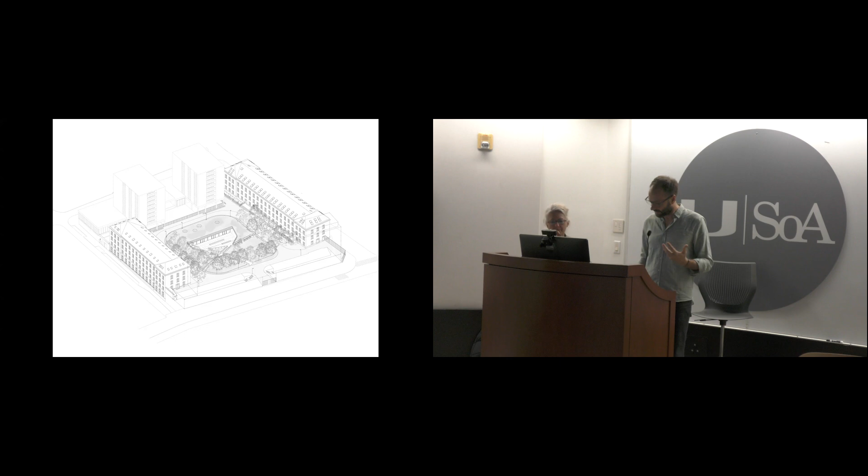So in the end, we just dug a little bit into the ground, creating three different pathways, three different stairs with different speeds for the students to come into the entrance of the university. The stairs are at different scales, depending on whether you are in a hurry or if you have time.

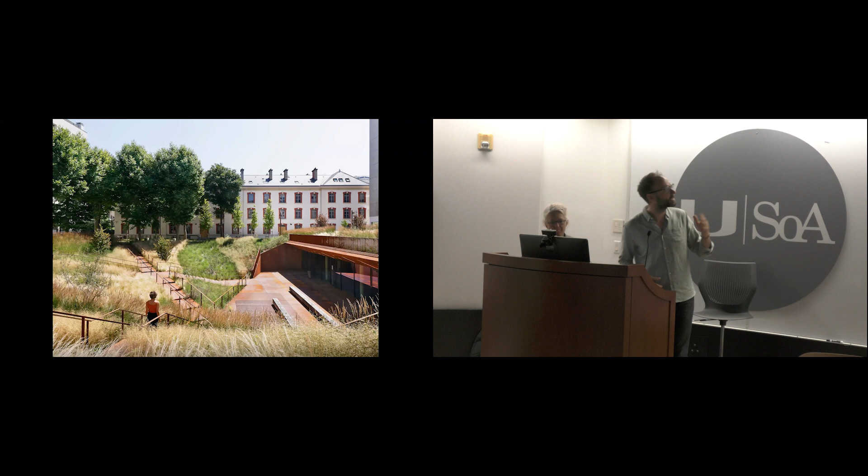You can enter this and then cross this garden, being quiet, coming out from the very loud city, and then entering the university through this opening in the ground, this opening onto a garden, like a scar on the garden.

So we created places to sit and communal spaces for the students to be inside. Instead of adding architecture, we're just creating a garden and subtracting things rather than adding them.

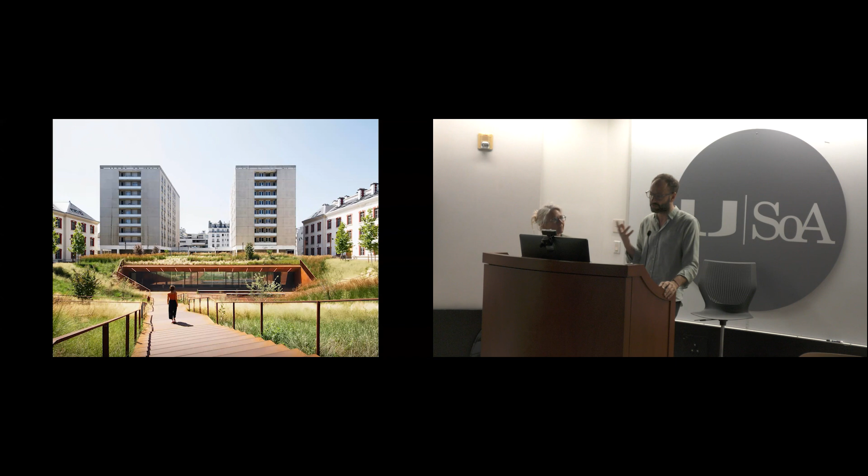So I think this is also a first step for us: thinking gardening, thinking architecture, and thinking architecture through the landscape, and not in the inverse situation. We also used this rusted metal, because I think this is more a landscape material that we use a lot in gardens rather than in architecture.

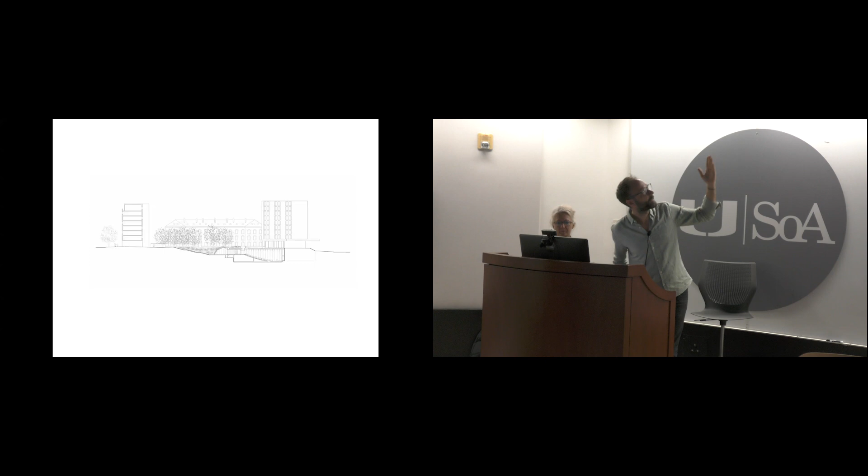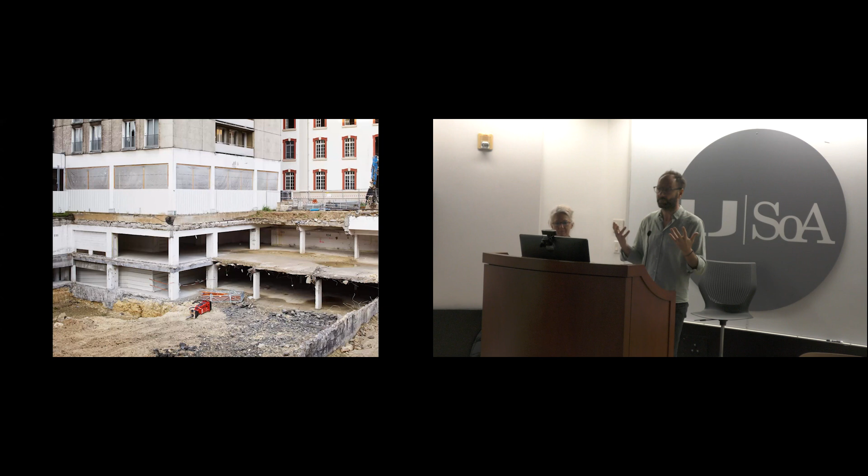So you're coming down from the city and entering this gallery, then you see the section where you just cross the garden, entering the gallery, which links these two buildings, and then going back into an auditorium. What was interesting here is that you had these two levels of parking that were totally empty. So we convinced the client to use this space, this volume which is already built, rather than adding another building.

Just destroying these intermediate slabs and creating an auditorium inside of it. So using what is already existing, acting by subtraction rather than addition, is also a very interesting act for us. And I'll show it very quickly, how we worked on the stairs, transforming this old barrack, creating these beautiful stairs that give also a sense of public space rather than only rooms.

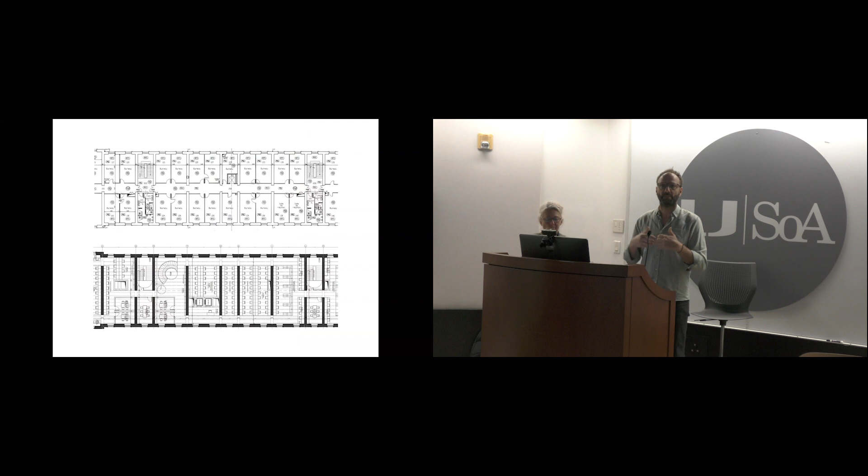Thinking about the existing structure, we couldn't break all the walls inside here because there were just rooms. So we decided to disconnect the intermediate wall from the facade, to create what in French you can call an enfilade, creating the sensation of a space but without creating a very large space.

And then we also reused material to create these lamps, creating this atmosphere inside of it. So this was the first project, very simple, showing how acting on the landscape is maybe the cornerstone of creating architecture.

This is also an office in timber frame, where we decided to be exactly inverted like this project on the right - not keeping the void and the landscape for us, but offering this to the city. So this strange shape came here just to create two gardens connected to the urban fabric, instead of creating a patio where you keep the space.

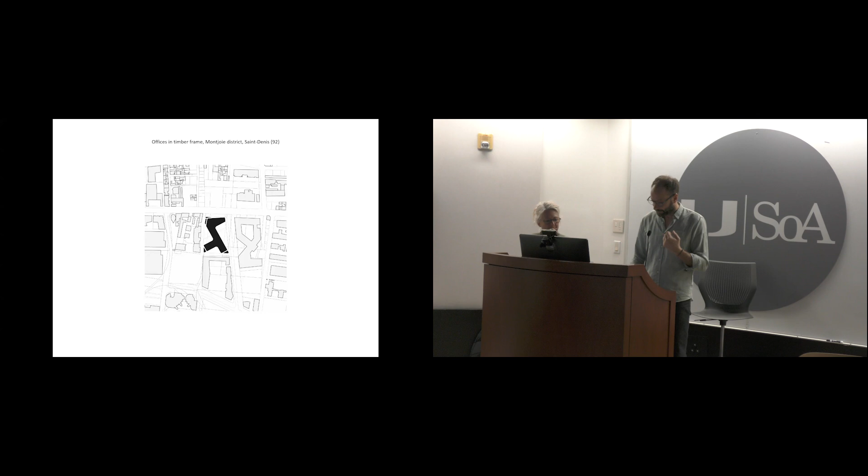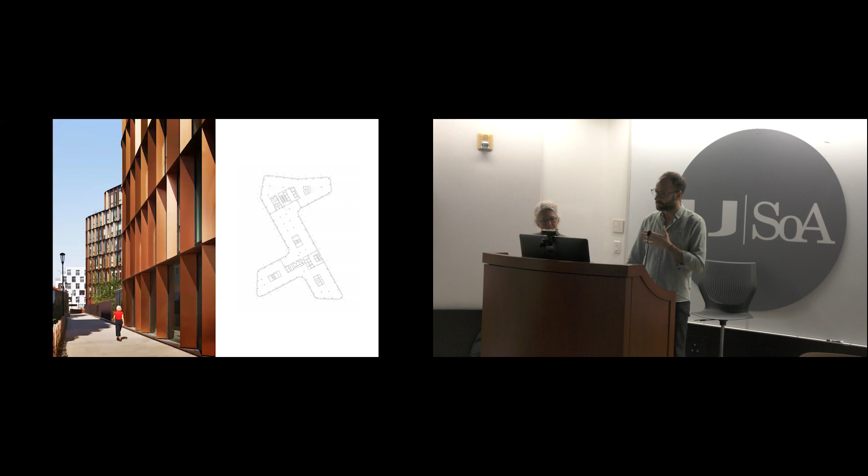So this is a strong position, creating two gardens that you can offer to the city, which defines the shape of the building itself. The building, made of wood, sits in between a garden. You can see the floor plan, these voids, the openings of the streets, and this very wild garden.

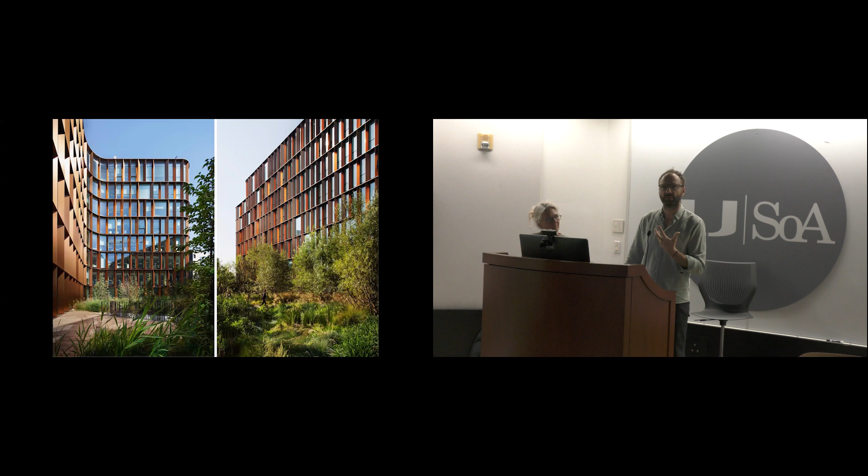I'll come to this a bit after, about how we think landscape should keep a little bit of wildness, something more ecological that can welcome biodiversity.

Again, simple collective housing and gardens in the canal in Pantin, very near Paris. You can imagine how creating this central garden defines the typology of the building, opening these courtyards and creating a relationship between the city and the inside of the project.

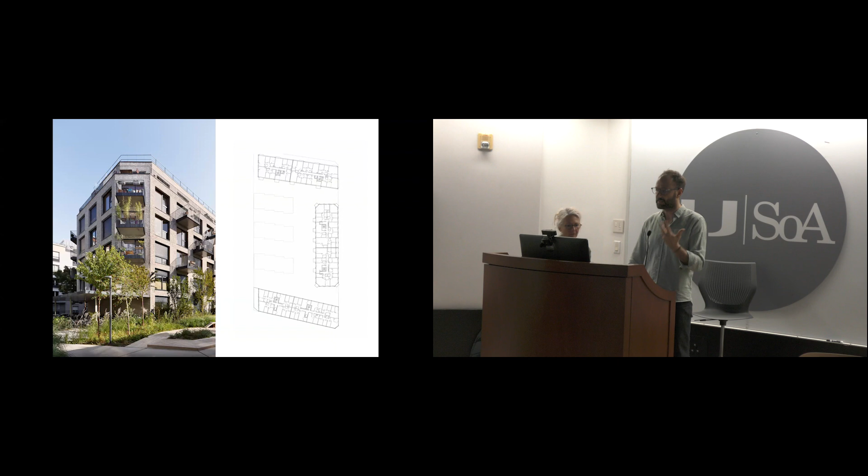So this is a facade on the canal, very simple, very open, so people can have this connection with the great landscape. And opening to the street, instead of closing off the area and the plot, creates an opening so that people from the city can enter this garden during the day. That was also hard to convince the client of, but offering this space to be shared with the public.

So you have this section with the different buildings, and this garden on the courtyard comes up on the roof of the little houses in the middle, creating a garden for the people, and a roof garden made only for birds and insects, not for people.

So this inner courtyard is open to the city, creating this relationship so that a public space, a garden, can really be somewhere people can meet in the city, and not closing this too much to the private area. That leads us to the second part of the lecture.

A garden does not simply occupy a plot of earth; it also mobilizes the mental space and helps to reconnect with experience - doing and observing, readjusting our acts as we go along rather than deciding on everything beforehand.

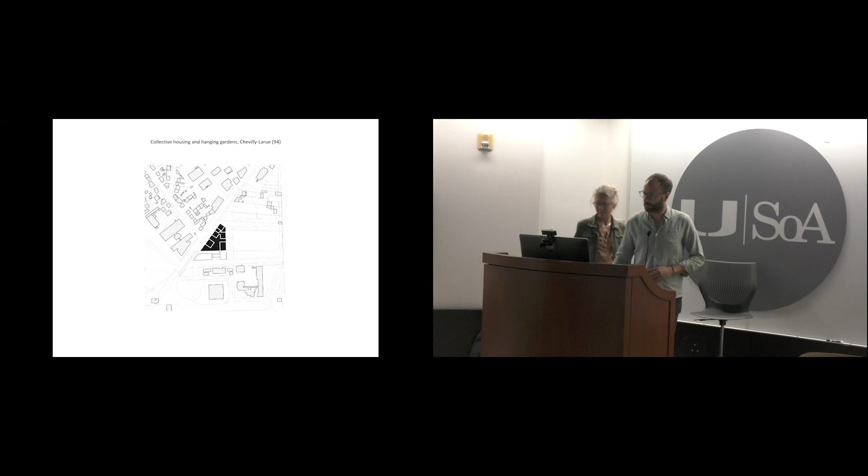On this subject, I will show you some projects like this collective housing, social housing, affordable housing in Chevilly-Larue near Paris, where we decided to create a lot of links between each building and create different spaces for the people to be shared.

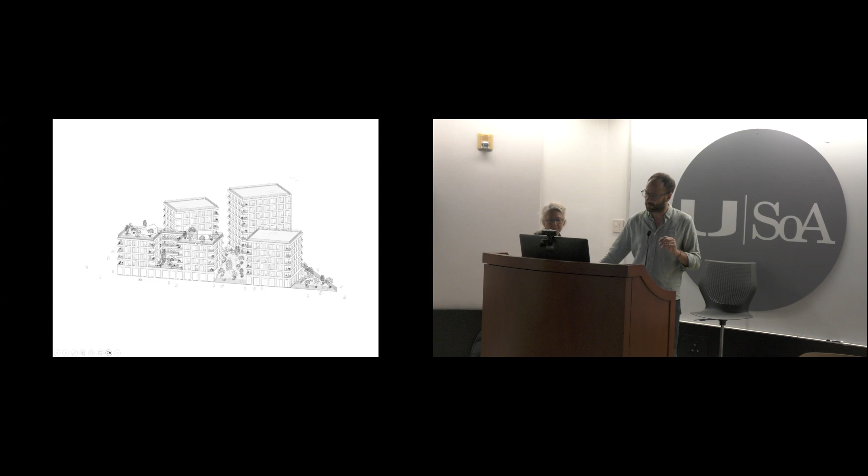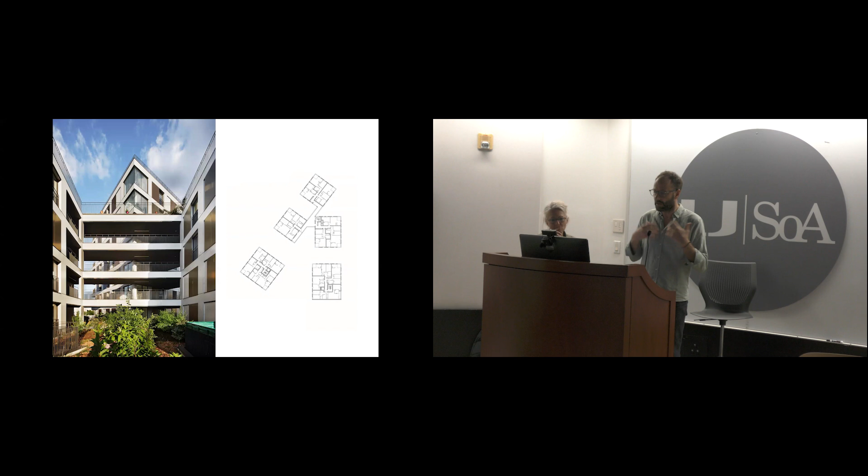So here you have several blocks. We exploded the program into 5 different blocks that could have links between this garden here, for the people of the city to cross, and then also a roof garden that can be connected just with simple footbridges. The idea is that this garden can create a communal life and allow people to spend time a little bit more together. I think this is very important, these gardens are good for environmental reasons.

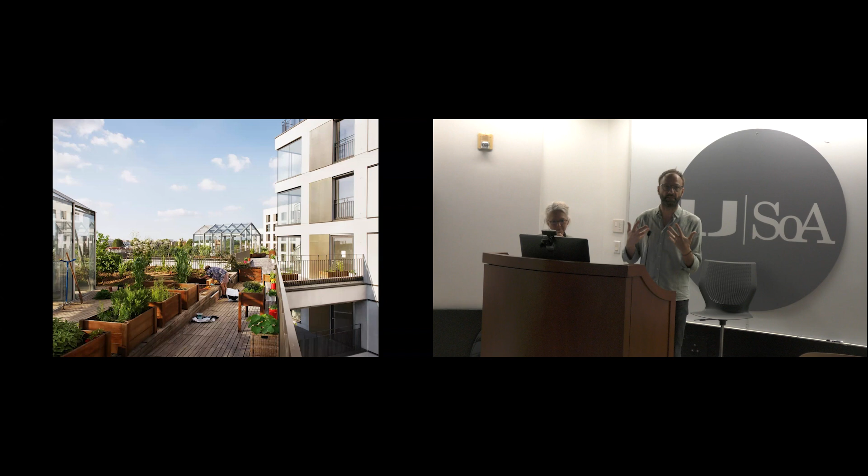But also for social connection between people here. And then this rooftop, because this is social housing, every space is very tiny. So these spaces, which are shared between all the housings, are spaces where people can share around this garden. Garden, as Pascale was saying, has this power of being shared between people.

Another project which is also very much defined by urban and landscape thought is this management school in timber in France that we just finished last year.

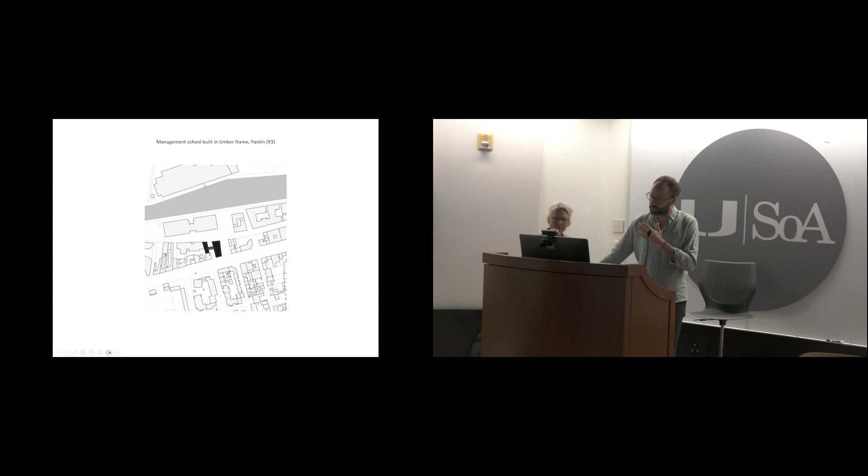So this is a wood structure, so you can see this difference between the massive wood on the first floor, and then it's getting more and more light, because of course it's different than concrete, so you have to adjust the quantity of wood you can put in a very simple frame.

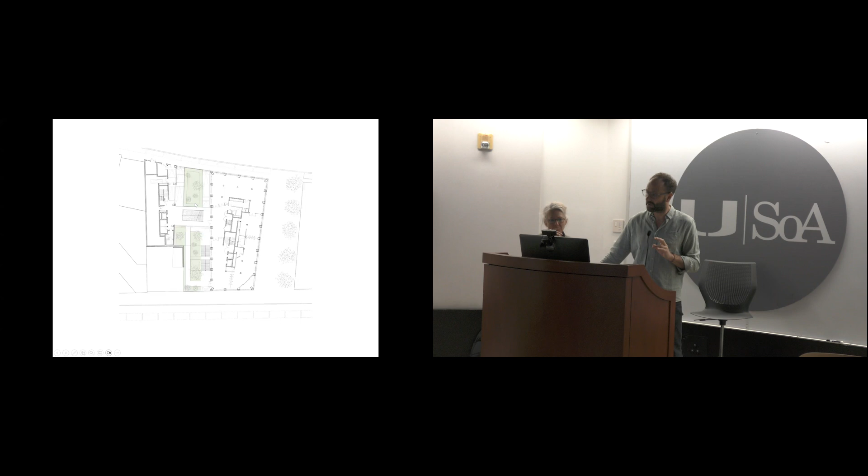And then the ground floor, with the garden, you can enter here and cross the entire school to go out the other way, on the other street, so that you can see this. The stairs, which are also exit for fire security, become outside terraces for students and places for them to spend time. So a few images from inside the school, which is very simple and rational structure.

And then of course this garden is connected to the passerelle, the footbridges around, and has this fantastic view on the city. I want to jump on scale and speak about a project that we are working on, the construction will start next year.

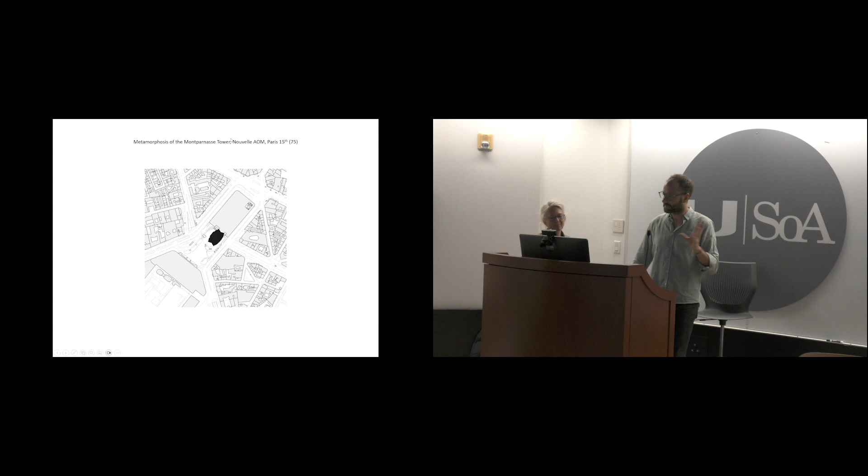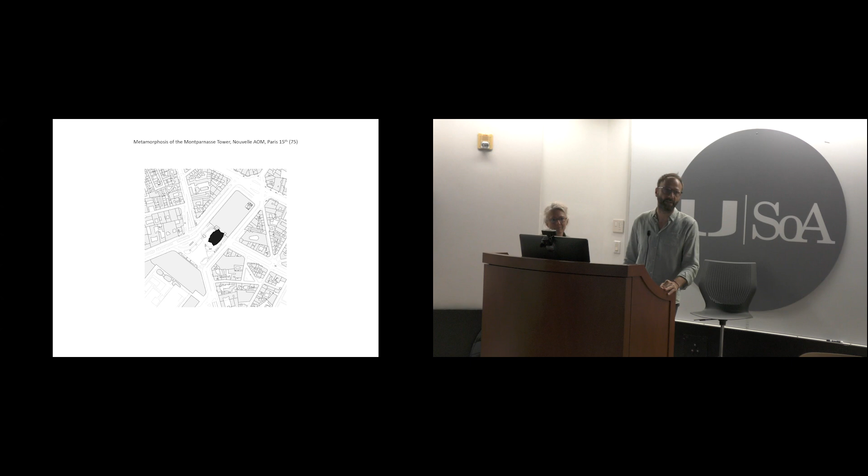It's the metamorphosis of a tower inside Paris, La Tour Montparnasse. It's a tower from the 70s, and we are doing this with a collective of architects, it's ChartierDalix, and 2 other offices from Paris, Hardel Le Bihan and Franklin Azzi.

Tour Montparnasse is this lonely, dark tower emerging from Paris, built in the 70s. It's pretty much hated by Parisians because, well, they don't know exactly why this tower is emerging very alone with no public relationship with everything around it. This was a huge trauma during construction, because they had to destroy half of a neighborhood to build this. For Parisian people, it was very violent. And then you see pictures from this construction here.

When we entered the competition, we were quite young architects. It was like 8 or 10 years ago. We were facing very great offices like OMA, like Dominique Perrault, like Jeanne Gang. And we were like, okay, that's why we created this collective and asked, what could be our idea?

Our idea is that maybe Parisians don't like this building, not because it's dark or because I like it or I don't like it, but maybe because it's just closed to the public, because it's just totally private space where no one can access. When you have such an impact in the landscape, like this object, and you never went there, then we think that this is also creating this problem. I mean, when you often go to a place, you don't ask yourself if you like it or not, it's part of your day.

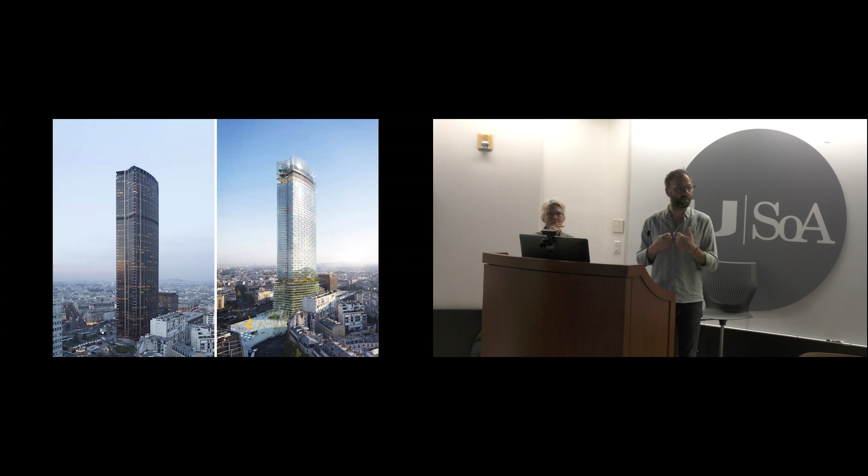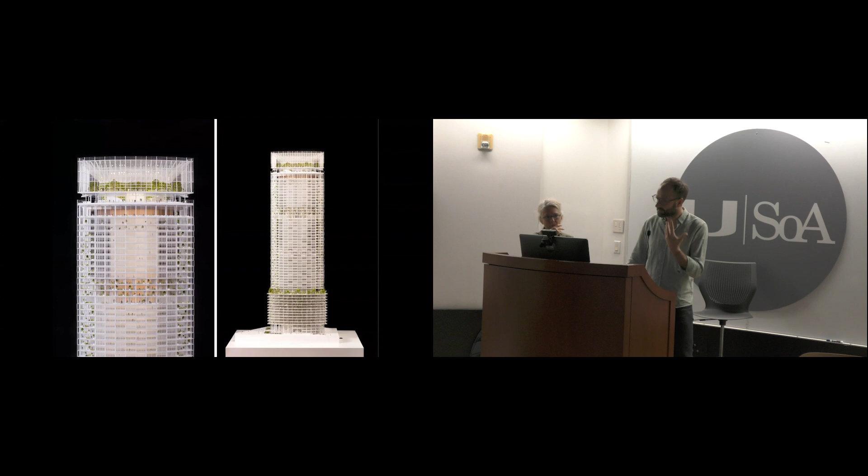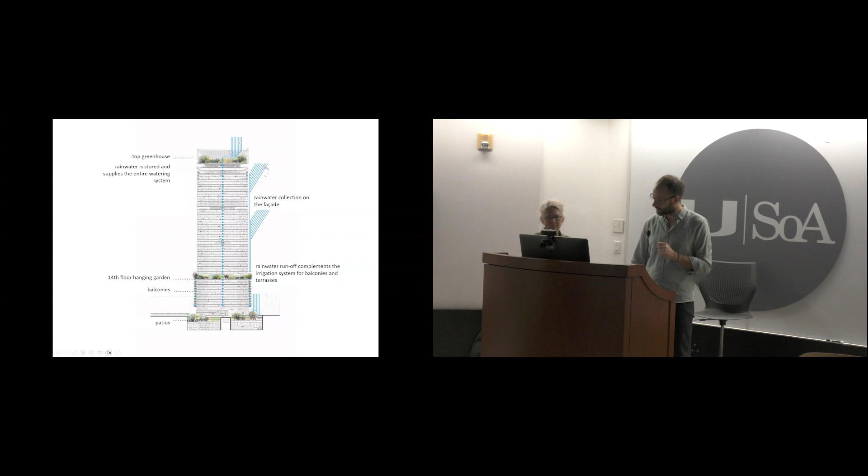The question of landscape and vegetation is maybe a little further away than in other projects, but enlarging the base and creating this garden allows us to collect rainwater on the facade that drops directly onto this garden, and also collect rainwater in the glass house on top. By collecting rainwater from the tower, we can create an autonomous garden on the 14th floor, open to the public.

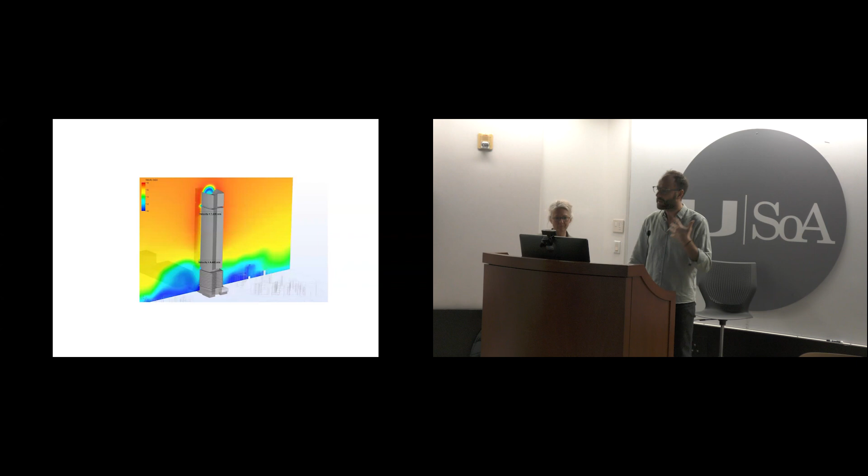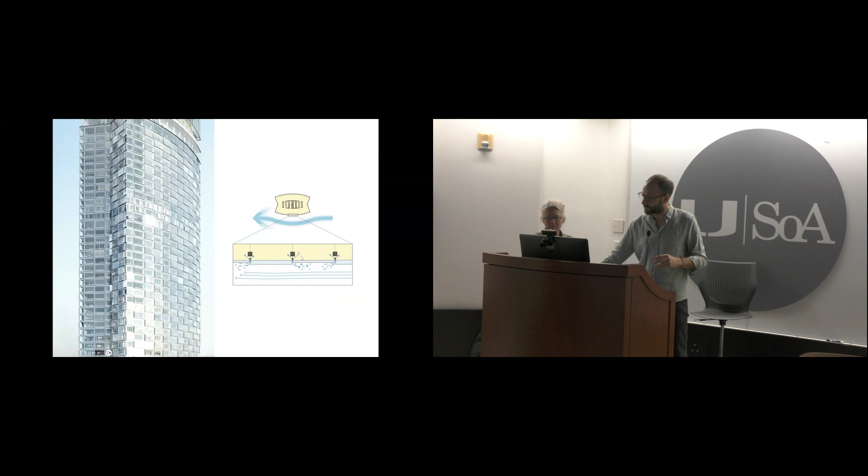We were also responding to the wind. The worst enemy of a tower is the wind, because it creates the strongest forces. So we decided to use the wind and create facades with a pattern moving one to the other, creating small depressions that make the air naturally enter inside the tower.

Using natural elements—rain, wind—we try to make this tower use a little less energy, creating also this glass house that ends the tower with a magnificent view of Paris. So you see that creating this landscape and these gardens can also create strong social links between people inside the city.

But I'll let Pascale introduce our last part.

Materiality and biodiversity. From an architectural point of view, the installation of the living within the built environment offers an opportunity to call into question architectural fundamentals: the ground, the wall, the roof. When we walk on a roof, it becomes a ground. If we plant on it, it becomes a garden. When we model its topography, it becomes a small piece of geography. The roof is no longer a simple covering, it takes on several roles.

The same approach can apply to a wall, which becomes lived in by fauna and flora, redefining itself in both form and function. The ephemeral and perishable character of the living also implies calling into question our relationship to time, the uncertain, and the random. Duration becomes an indispensable factor for the growth of plants and challenges the concept of completion, fitness, and fragility. This vision constitutes a veritable laboratory for us and allows us to test new means of expression.

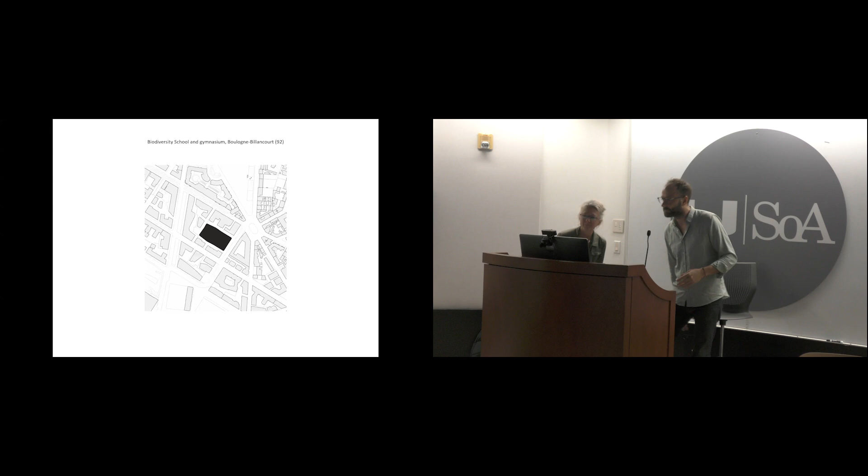So now we are going into a more research-oriented part of the office. As you've seen in the previous project, we were using landscape to imagine these two disciplines, architecture and landscape. They have always been side by side, but we think it's super important to merge them.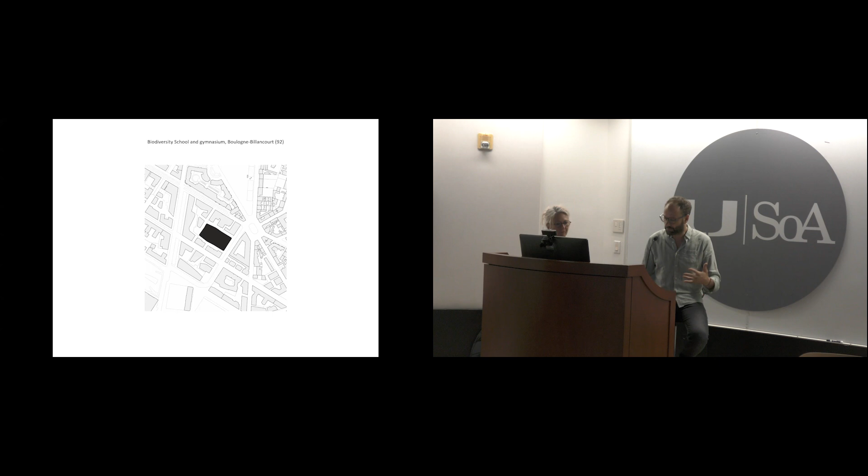And now I want to present some projects that were redefining our way of imagining architecture. This is a school that we finished, that we built about 10 years ago in Paris.

The School of Biodiversity. This was a competition we entered, and the city, in a very dense area, wanted a garden and wanted a school. So they said, maybe we could put just a garden, a public garden, on the roof of the school. So, okay, let's think about it. This was the main subject.

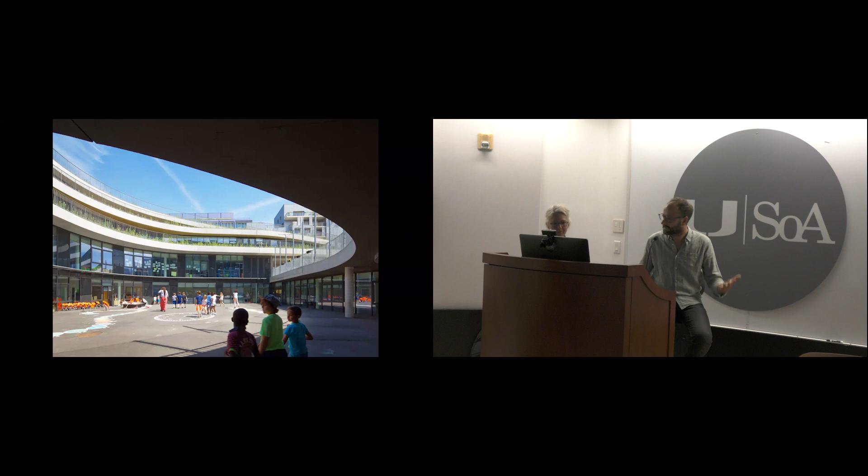So we designed this school with a form where you have the kids on the courtyard, and maybe also the roof is a place for the kids to learn. They can walk on this roof, which becomes the new soil, and experience the way you can have a meadow, a prairie, inside the city.

Maybe some of these kids don't go to the countryside every weekend, so it was very important for us that they can experience something different. Suddenly this roof becomes something different than a roof. It's a place for the kids to learn, a learning tool also for them.

All the teachers take the kids on top, teaching them what is a leaf, what is an ecosystem. What's interesting here is that this roof is not only good for environmental reasons—reducing heat, retaining rainwater—and good for biodiversity, but it's also a place to create strong social relationships between people, between the kids during the day, and between the people of the city through this little house here during the weekend.

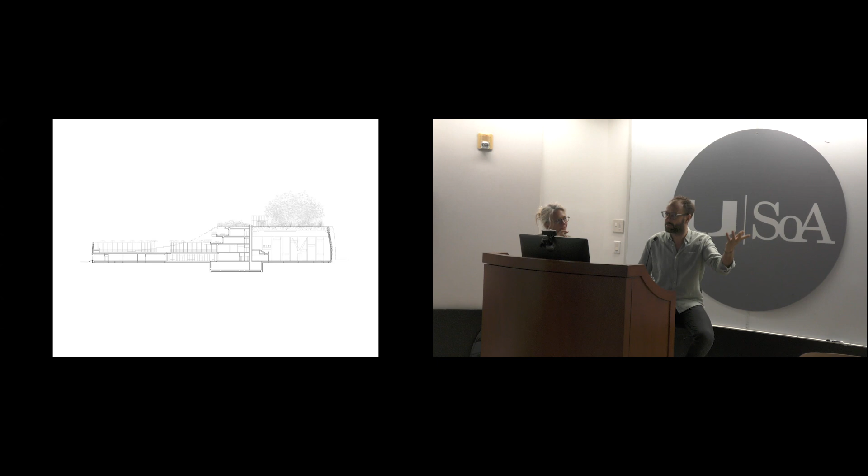We were really pleased that after 10 years, this roof is really becoming a small forest on top of this building. And it's quite working, because if you see the section, this garden is on top of this sport space underneath it, so the relationship between the programs is also very interesting.

This is a green roof, a natural green roof without too much irrigation, and a place for the kids. But what's very interesting here that we try to push is the relationship between the permeable ground, the roof, and the facade. The facade becomes a component of this architecture and plays a very different role.

Architecture was thought at the very beginning to protect against water, maybe in Miami also against the sun, but mainly to protect against water. But when you think vegetation, you need water. So it's the first paradox to think about. How do I deal with this huge paradox? Retaining water on a building is maybe too complex, maybe doesn't make sense.

But slowing water—collecting it and slowing it—so that this facade now is more an irrigation system, because it's a way to slow the water that comes down from the roof to the ground. If you see this diagram, you can see the path of the water. Every block brings the water very slowly from the roof to the ground, like this play for kids where you put a small ball on top and it falls down every day.

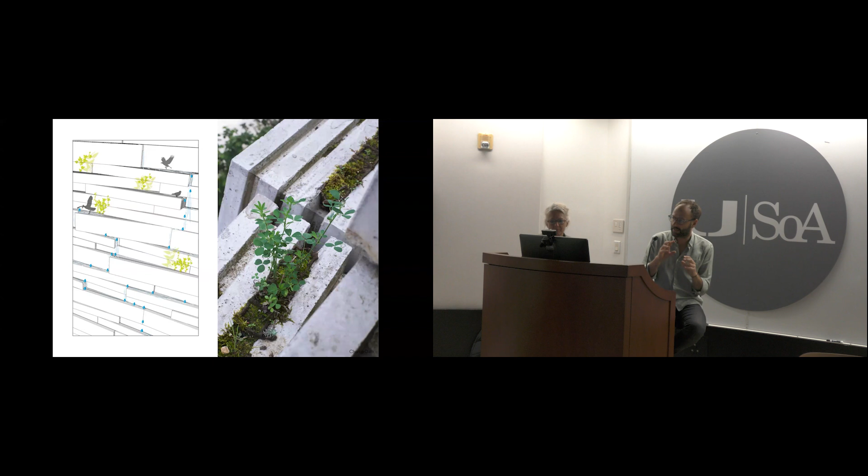So on this first experiment, we had no soil on this vertical system, rather than very small amounts. It's more like a micro landscape, like on a rock wall, that appears on this project.

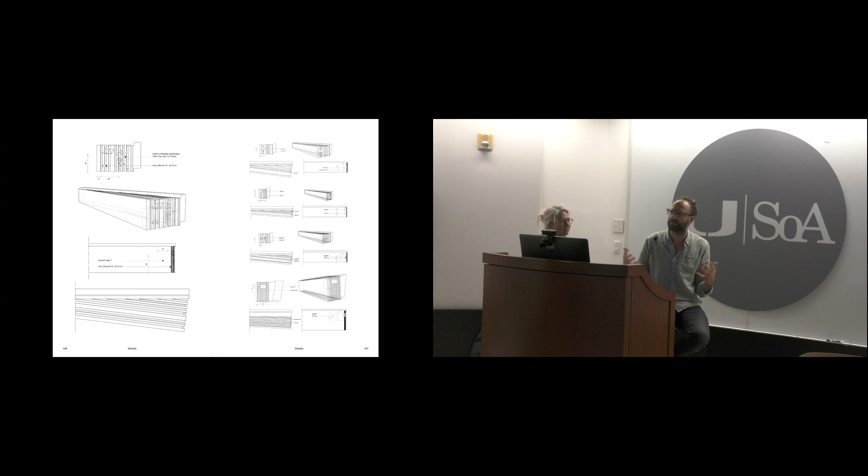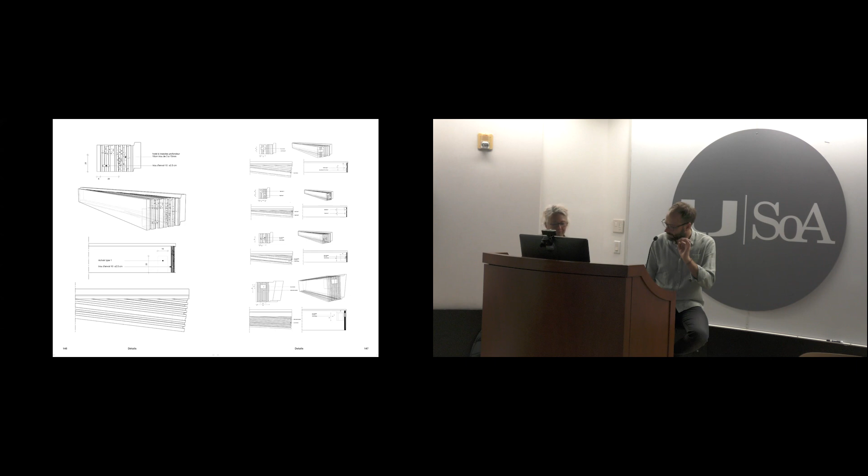And then suddenly we had to design things we were not very much able to design, because we're used to thinking about people and the programs we daily think about in architecture. But suddenly we had to design an irrigation system, maybe a hotel for insects, maybe a small hole for a bird—so it questions us about the scale of architecture. Now we have to think.

Everybody knows this drawing from Le Corbusier, the Modulor, modern architects from the 50s in Europe, thinking that all architecture has to be thought about at the human scale. But maybe it's interesting also to think now that there are other scales to consider in the city—the scale of the rest of the living.

I mean, you have to understand me—I don't say this lightly, we were having this discussion with Lily. We don't draw houses for birds, that makes no sense. I don't know what the birds need, but maybe creating situations, cracks, holes, depths that allow this living world to install itself. The building as a situation.

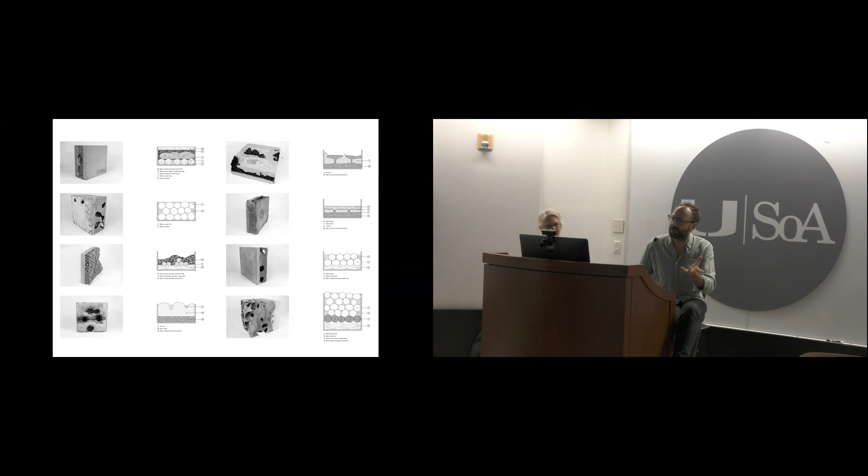So we were looking at concrete, because concrete is very practical - not very interesting for carbon footprint, but also very close to rocks, with thermal inertia and things like that. So we were thinking how we could pour concrete and create an interesting mold, where you have this soil that can pass through a block, and so it can be held in a vertical way.

And we discovered also that this creates a very interesting materiality, playing also with mycelium, because mycelium has this capacity of creating its own soil when it dies and then regenerates. We really like this materiality without making too much effort - this complementarity between plants and concrete.

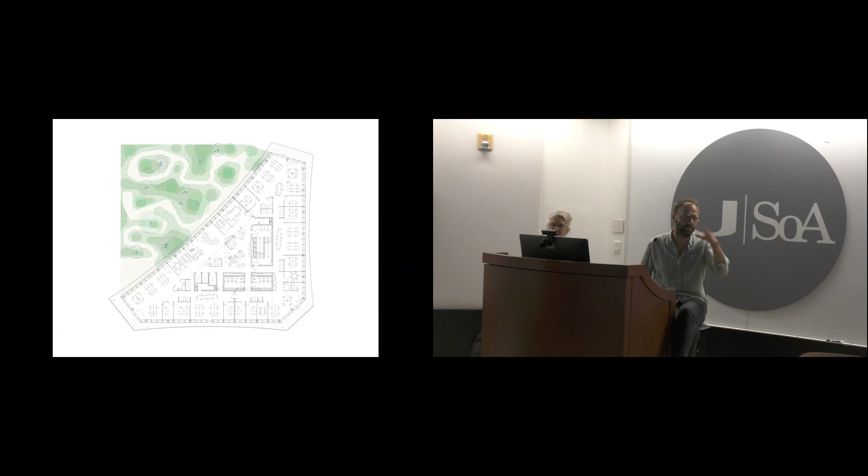So you have this very simple plan with this triangle. One is built, one is a garden. And then these very simple lines, shapes of the balconies, allow people to come outside. You have the garden here on this part.

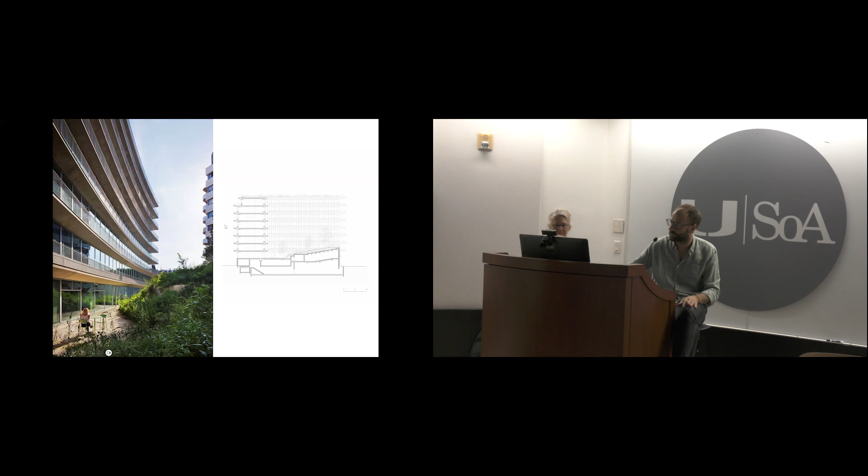But I want to talk a little bit more about the garden that we create here on the top of an auditorium. Here you can see that this garden is almost a hill on a very flat land where people can climb, and then have a moment of peace here while they are being treated in the hospital. So you have the views outside.

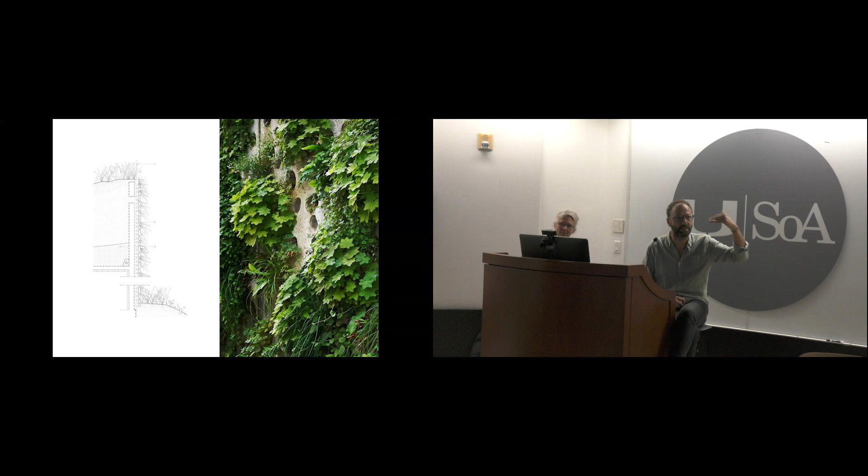Here we applied this research that we did between the garden and the permeable ground. We had this connection of soil, so if you imagine the green roof is not cut off from the outside, but is in connection with the permeable ground, when it rains on the roof, the rain just comes down through the wall and goes to the ground. When it doesn't rain, by capillarity, the water in the ground can go up. Imagine all insects and small biodiversity are able to take these secondary routes to go onto the building.

So we wanted to find a very simple way to build it. With the workers, with the contractors, we asked how we could do this without over-designing it. They had this idea—not us—using these little plastic bags filled with sand, creating this shape very simply, pouring concrete on top, with all these panels put here. So you have the soil inside and the roof, and at the end it produced this. You have the garden here, accessible during the day for people from the hospital, and the relationship between the garden and the permeable ground through this wall.

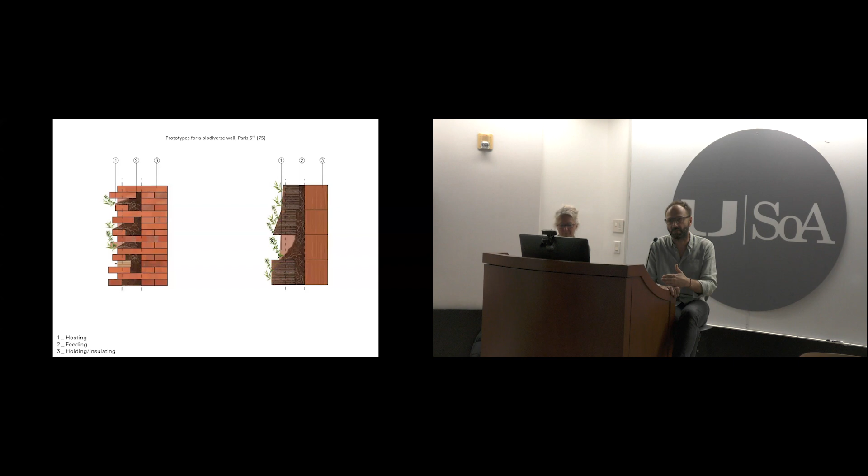Then we thought, okay, concrete is nice, it's very simple, you can pour it, but it's not so good for carbon footprint. So maybe we should think about other materiality to do this—what we call the biodiverse wall, where the structure of the wall is the structure of the soil. It's not two layers.

So we made different studies like bricks, terracotta, and dry stone. We had the chance to be in relationship with the Natural History Museum in Paris, and they allowed us to do these prototypes. We planted them with the exact same seeds in the exact same place, and we saw that the result was quite different. Dry stone works very well compared to bricks, because it's not the same materiality, it's not the same void that you create.

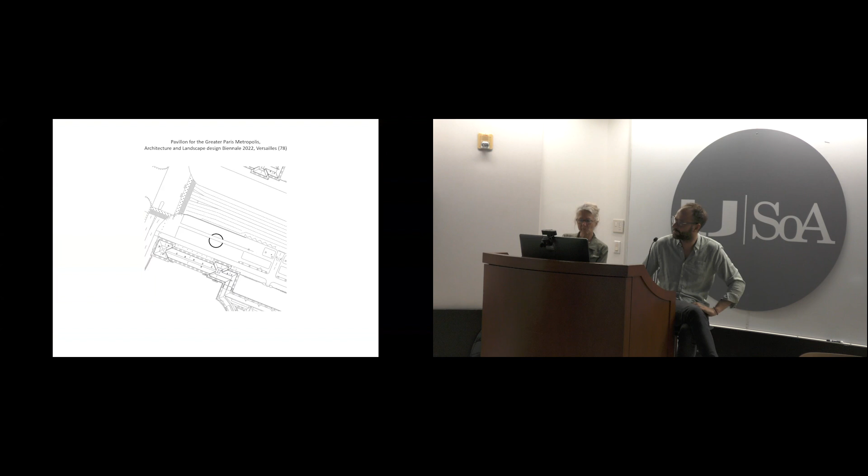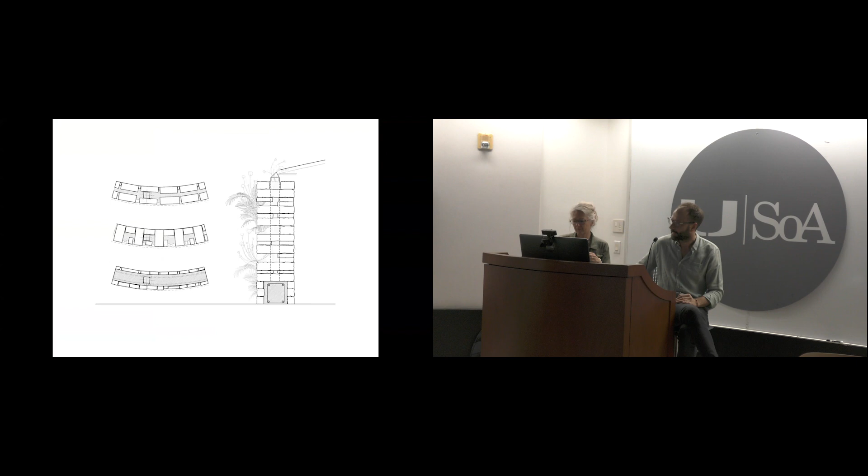So then we were selected for creating a pavilion at the Design Biennale in Versailles in 2022. We decided to apply this concept by creating this pavilion outside as a dry wall, in a very simple plan, this circle, with a roof on top. We conceived this dry wall where we also put soil inside, where the structure of the wall is the structure of the soil. We planted it—this is after the plantation, with no relationship to the ground. The roof again has this irrigation system—these little lines allow the water, when it rains, to come down on the roof and irrigate the wall.

This was the inside where we could put some photographs during the biennale. After two months, it was really spectacular how this vertical garden is on this wall, but is part of the wall, part of the structure itself.

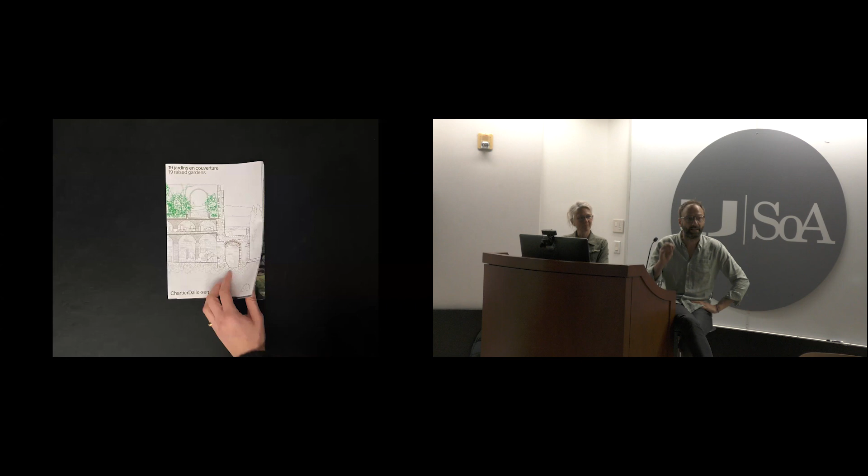One last word, 30 seconds—I want to make a little teaser about the next book we are going to prepare. It's a study about what we call raised gardens. Rooftop gardens are now very common, and in a lot of regulation throughout Europe and the world, but we discovered that it has a history, especially in Europe. There have been centuries where these roof gardens were thought about.

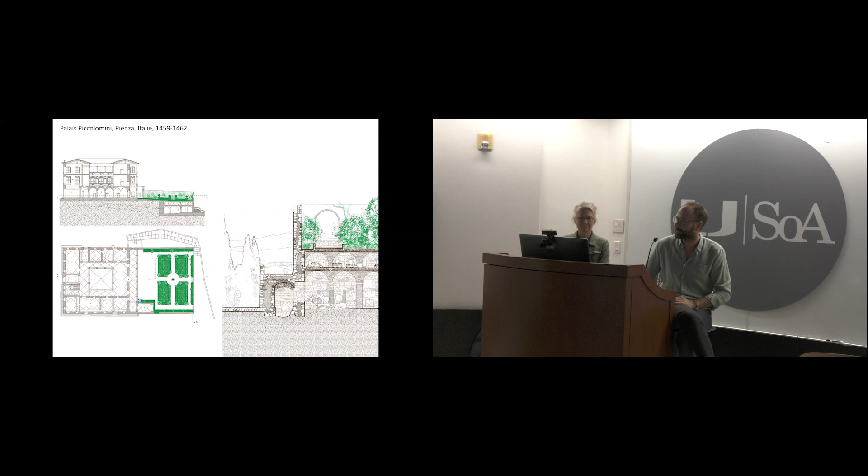So we had a study around 19 different gardens in 8 different countries, trying to understand why the ancients were already using this idea of creating a garden on top of a building. What a crazy idea, right? But they are in different locations, various species. So we were visiting and redrawing a lot of different buildings. For example, the Palazzo Piccolomini in Italy, built like 500 years ago, where you already have these gardens on the roof, on top of another program, creating this fantastic landscape all over the country.

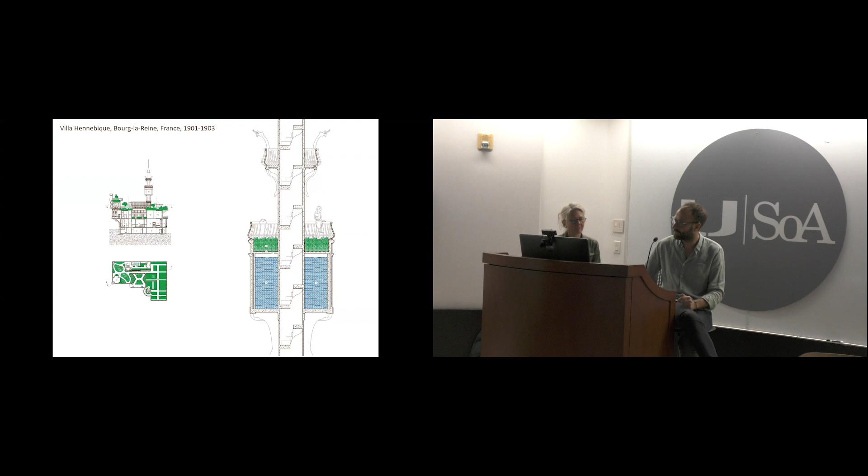Or for example, here in Paris, Villa Hennebique, the first building built in reinforced concrete, where you have these gardens and also all the irrigation system taught into this tower that collects the rainwater and then allows them to have a roof garden.

So voilà, it's almost finished. I think it will be out in the bookstore in maybe 1 or 2 months. And still, the book, our monography, which is out now, it's like 15 years of projects, 30 built projects, only built projects, because for us, biodiversity, landscape, and architecture - what is interesting is what is built. So let's build our dreams and merge vegetation, architecture, landscape, and social relationship. Thank you for your attention.